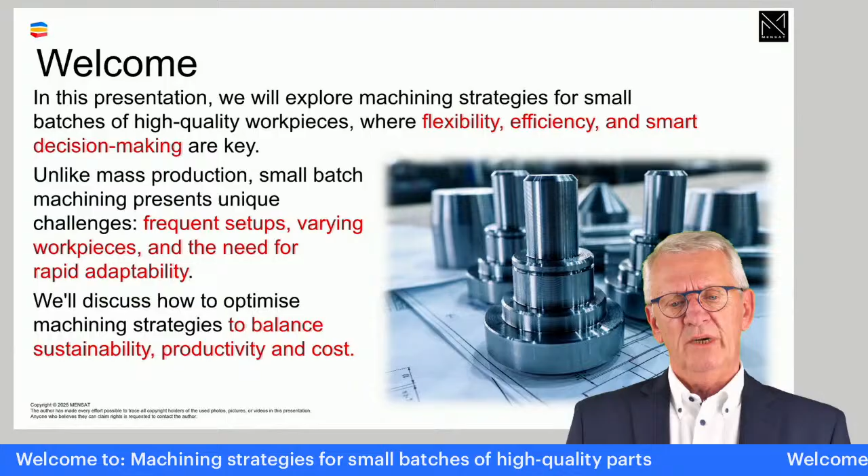While if we talk about small batch production, it's very much the opposite, and that's why we started to ask the question: if we look to machining strategies now, is there a difference related to whether it's mass production or small batch production? And the answer is absolutely, there's a very big difference. And in this hour, which is very short, we want to draw your attention to a number of things.

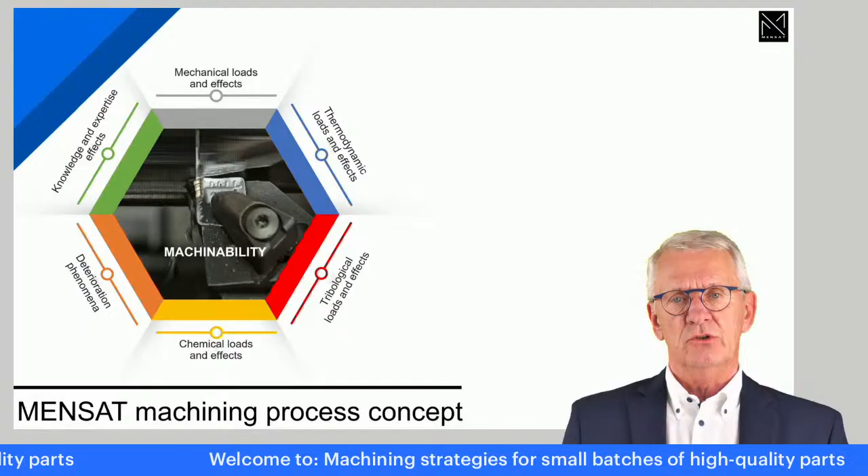Now, the underlying model I always use for this type of presentation is a machining process concept, where we say machining is a physical process where we form workpieces by removing material from it. And in doing so, in this process, there's lots of phenomena taking place. You have the mechanical side, thermodynamics, and so on. We have to make sure that all these things are in balance with each other. And balancing these means that all the variable elements, we need to understand how they interact, how they influence the process, and make sure there is a balance.

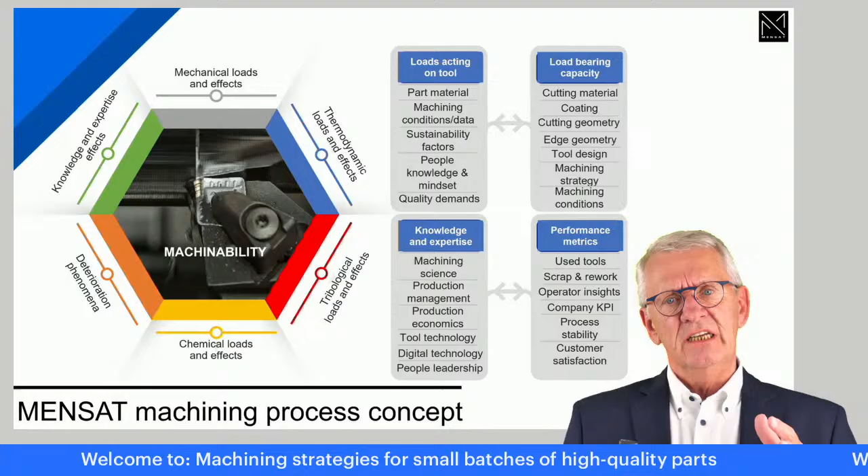And to make that happen, what we need is, I call it the knowledge side. We need knowledge of the process, we need experience, we need expertise, and so on. And all of that we need to put there so we can create the balance we want. In such a process we also need, of course, metrics. We need to measure how good we are in balancing this process, so we need metrics to measure. And on that, I'm going to talk several times today on how we can use certain elements to see, to measure, to evaluate what is going on.

And if we do all of this, machining leads to the wanted result, which is kind of a multidimensional thing. The wanted result is quality of the finished workpieces, of course. But the wanted result is also economic, because machining is a very nice thing from a technological perspective, very exciting to work with from a technological or scientific perspective. But we should not forget that in reality, in the industry, people do machining in their production with an economical perspective. They want to make some profit, they want happy customers that are happy with the delivery times which were promised and so on. And there is, of course, also, with one umbrella word, the sustainability side of it.

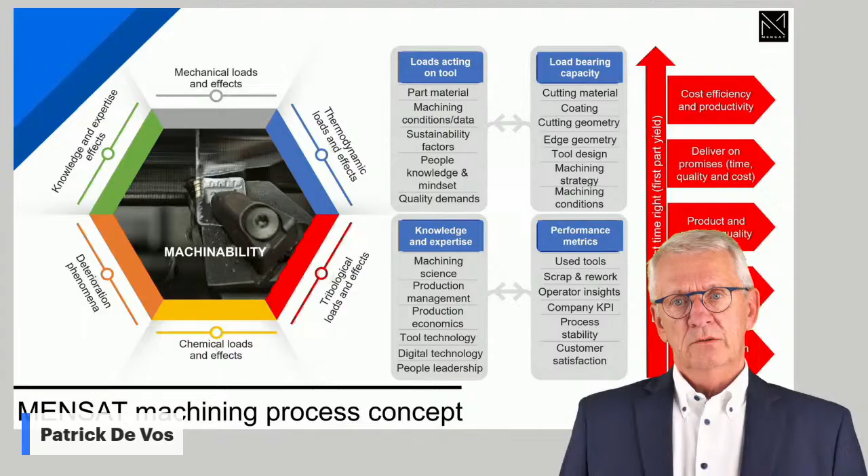Today we are going to spend quite some time on this, because if we dive into machining strategies, what are the differences between mass production and small batch production, it's mainly in the sustainability dimension that we see big differences, and we have to anticipate on that. Now, if we talk about machining, we want to produce high quality workpieces at an acceptable cost and price for the customer. We want to keep our customers happy, meaning we deliver in time, with the wanted quality and quantity.

There are things we have to make work together. There is the strategy side: how are we going to do something? There is the tool side: which tools are we going to use? There is the machining data side: how are we going to use the tools in the application? And there is the human side, the intelligence side, because somebody needs to put things together in a working order.

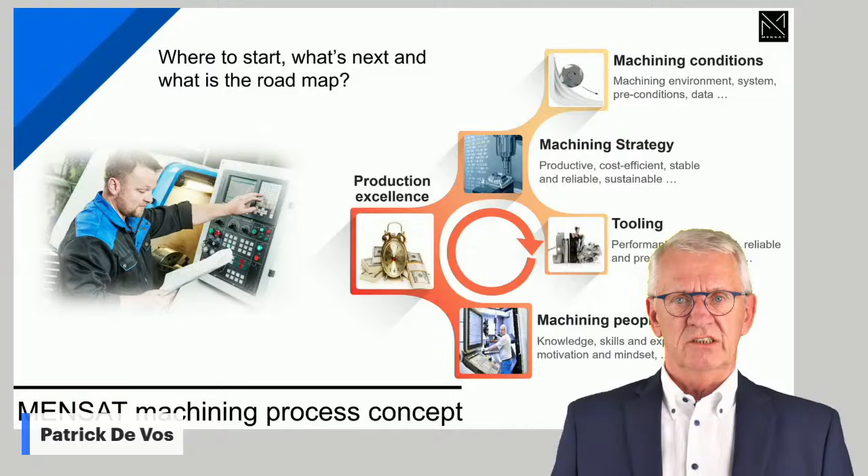If you look back at the previous events, we have been talking about tooling from this perspective, and we have been talking about machining data. Today we want to talk with you about the strategic side, the method side, the machining strategy side of it, to create as full a picture as possible.

I'm of course not alone. I'm together with two lovely colleagues that are helping make this possible. As I always say, for me this is big fun - I like to talk about machining, but there is the hard part of making all of this happen from a technological perspective, and the two ladies are taking care of that, Alesia and Margarita.

The agenda of today: there is a first part which we are going to walk through very, very fast. That's the technical side, the technological side of strategies. That has been discussed so often that here I just want to bring to mind some basic stuff again. I want to focus mainly today, when we talk about machining strategies, on the economic dimension and the sustainability dimension, because that's where we are going to see big differences between mass production and small batch production.

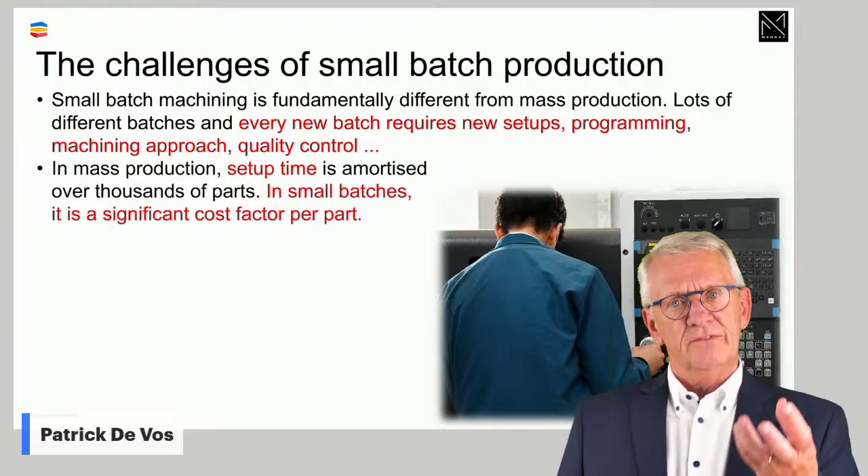One of the elements we take into account when deciding which strategy is best to use is the impact of the strategy on setup time, because some strategies will demand more setup time than others. And that goes for all the other factors too: downtimes, unexpected downtimes, scrapped workpieces due to bad quality, total tool life impact, and so on. It's all very different compared to mass production.

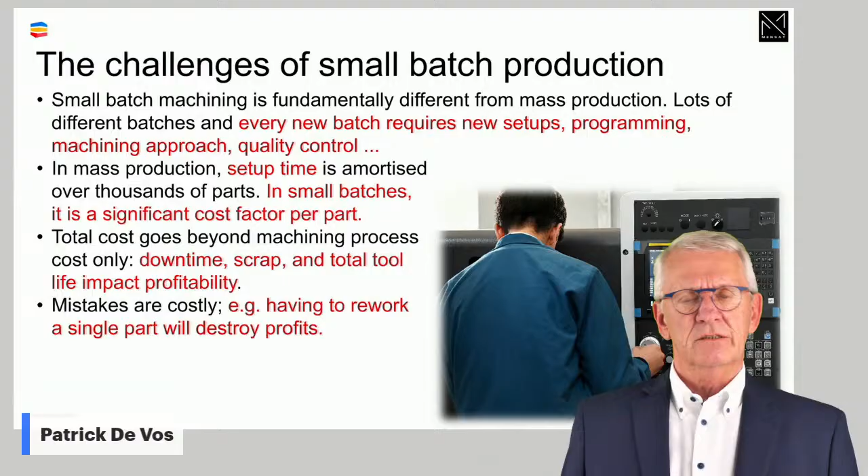And last but not least, errors and mistakes. If you destroy a workpiece when your total batch is 1,000 workpieces, you lose 1 out of 1,000. If you need to produce only one workpiece and you kill it, you destroy it, you lose everything. You can restart, but restart means the same costs again, the same time again. Trust me, your customer will not be happy. Some people take care of it and say, well, to minimize the risk, if the customer needs one, we will produce two - if we lose one, we still have one.

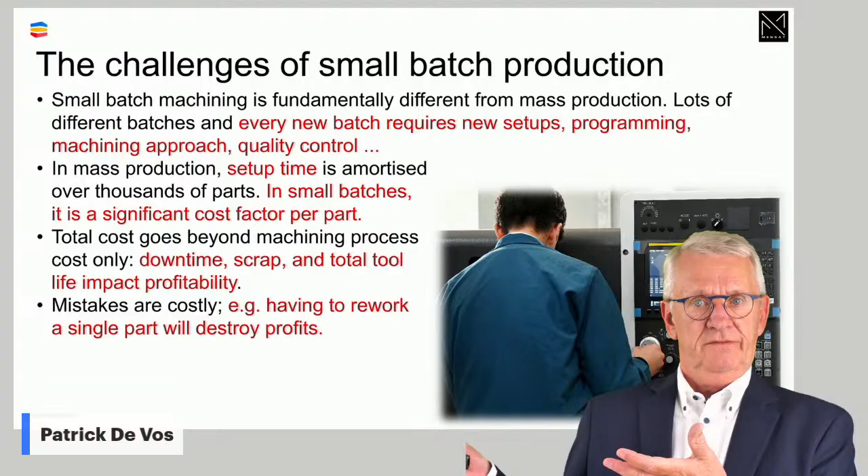The finance manager in the company will not like that, because if you do that for a whole year, that means by the end of the year you have an enormous stock of security workpieces, which has cost a lot of money and time in production, and they are lying there doing nothing. So the finance people will say, what are you doing? It's a tricky thing, small batch production.

Now, if we talk about tool selection for small batches, there's always that dilemma, because tool selection and machining strategy - the question is, which one is the driver? Is it the selected machining strategy that decides which tools to use, or is it the selected tools that will tell you which strategies are possible?

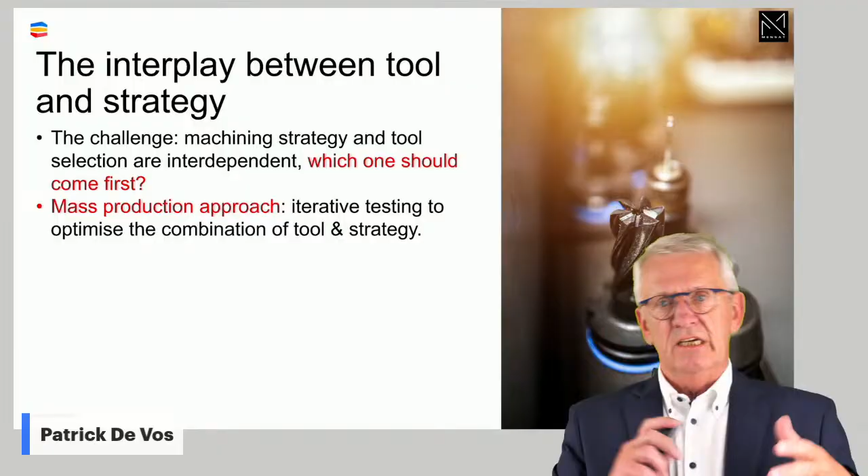In mass production, people take it the pragmatic way. They say we start doing testing, we make combinations, and we see in the end which one serves best. In small batch production, that's not possible. Well, it's possible, but it's not justified from an economical perspective. You can't test for a week to produce one workpiece. So you need to make a decision up front before you start machining.

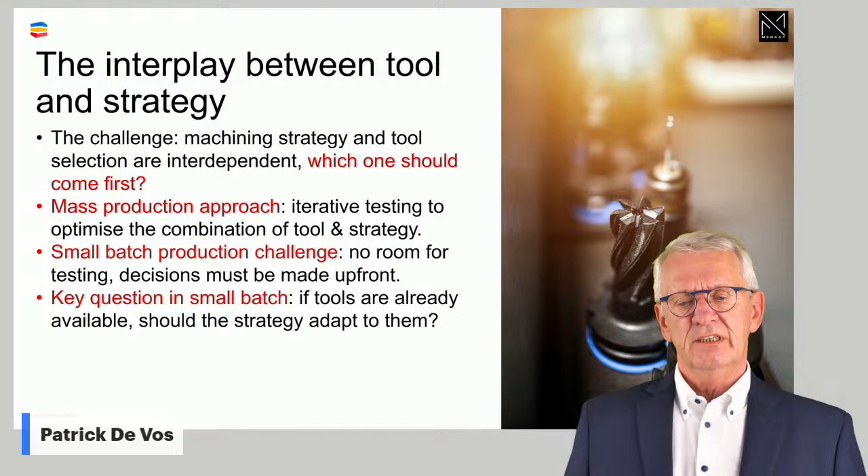And a key question you are going to confront is: if we already have tools in the workshop, from all the previous workpieces we made, should we reuse those tools and modify the strategy? Should we say, okay, we already have a whole range of high feed milling cutters, and for the next workpiece we think high speed would be best - should we say no, forget about high speed, use the high feed cutters and modify our strategy? Is that what we do or not? Or do we say, no, we need high speed, so we need another set of tools, we need to buy another set of tools?

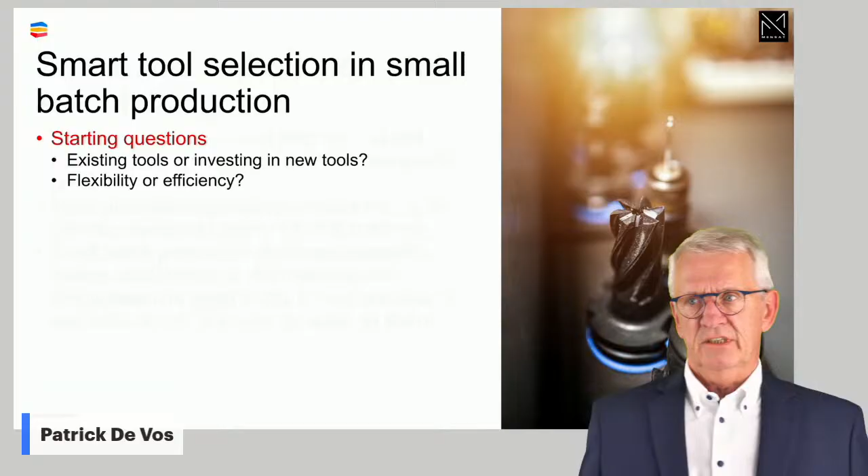In small batch production, if you talk about tool selection - and again, I'm not going to make friends here - I don't think you could leave this to technical people, because technical people are much too much in love with machining, the technical side of it. It's rather more of a management thing here. Should we maximize the use of existing tools already, or should we invest in new tools? In other words, should we go for flexibility in tool selection, or should we go for efficiency?

And if we try to put some criteria together for new tool selection, it's about versatility. If you go for flexibility, you need versatile tools. And people say, yeah, but versatile tools, situation by situation, are perhaps better solutions from a technical perspective. Then you put the process cost efficiency on the table - I want to do workpiece by workpiece efficient machining, cost efficient, time efficient, quality, whatever efficient. Yeah, it's okay for me.

But then you have the other question popping up: if you have a very efficient tool with a tool life of 2 hours, and you only needed 10 minutes to produce that one workpiece, what are you going to do with the remaining tool life, the total tool life utilization? That is then a thing. And it's not only for tooling - the same question comes up with setups, workpiece holding, and so on. Should we go for flexible systems, or should we go for efficient systems?

Reconditioning and reuse of tools in small batch production, I think, is a very important thing. Because in mass production, very often people exploit the possibilities of the tools to 100% already, and then, is there something left for reconditioning - that is the big question. While in small batch production, it's a completely different situation. I have seen tool cribs, where they keep the tools, where 90% of the tools kept are still very capable of being used in another workpiece.

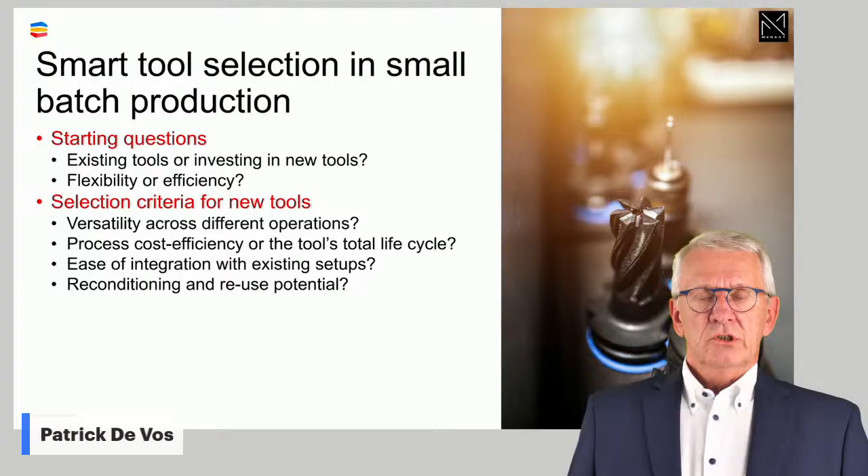The tricky part is nobody knows how much. People say, yeah, of course you can still cut with it, but if you ask the question, how long? I don't know. And that 'I don't know' - there you have an issue, because who dares to take a tool and start using it if you're not sure it's going to do the full job? Think about what happens if the tool fails - broken tools, but also destroyed workpieces.

In small batch production, if you put everything on the table, all the different things that are important in production, in 90% of the cases, and everything depends on how you did before, the best approach is to say: okay, I have my set of tooling, and it can be cutting tools, but also clamping tools, measuring tools, whatever equipment you have around the machines. I optimize the process around the tools. This is the tool, that's it. Now, to produce a workpiece, which strategy, which cutting conditions, which cutting data would I use to make sure this tool does the job?

In that respect, CAM simulations - I would urge you to do even more CAM simulations in small batch production than in mass production. That's a misconception. People sometimes think if I need to do a big number of workpieces, I should spend the needed time preparing, on CAM and simulating, and that's correct. But in small batch production, it's even more important, because if you fail on the first workpiece and you need only one workpiece, you are into a collision course with your customer. So it's so important, that CAM simulation part.

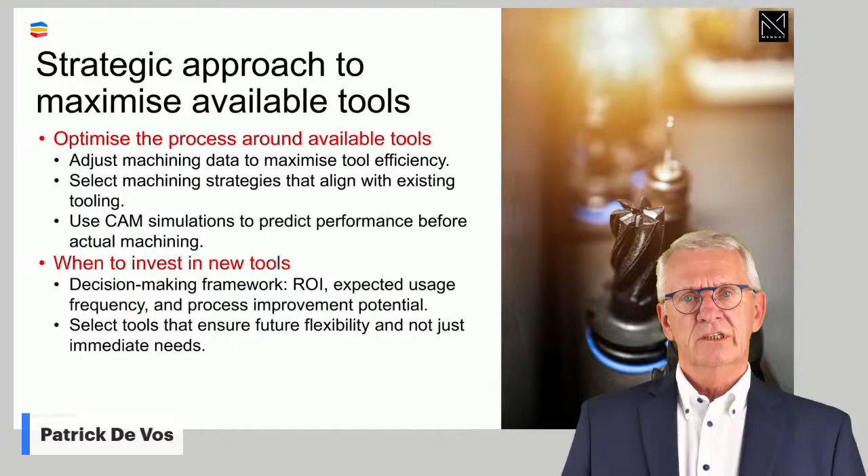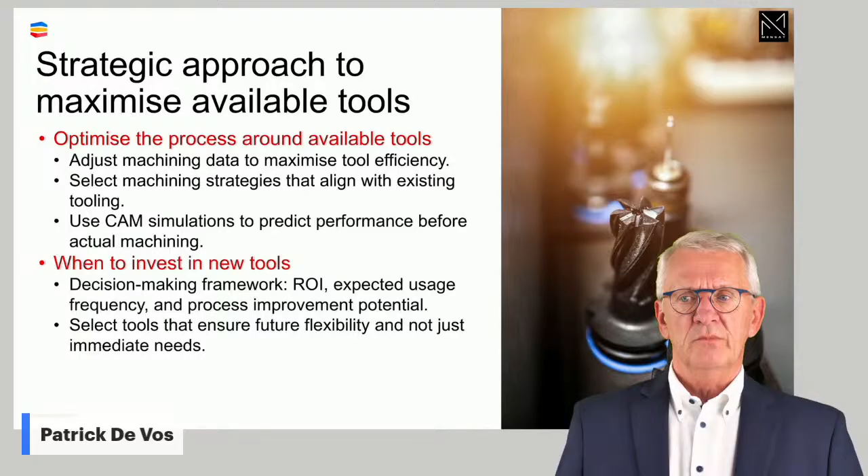If you invest in new tooling, because you can't run the same tools forever, now and then you have to challenge the tools you have in a workshop and ask yourself, is this still what is best available for me? Make sure you use a full vision decision-making framework - not select a tool which is best for one workpiece, but look to the total return on investment for a certain tool over a number of different workpieces, over a certain time, over a different number of machines, and so on.

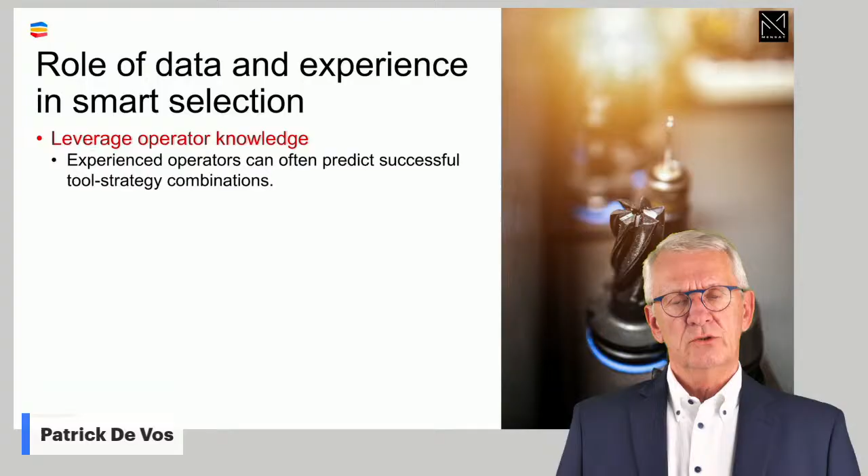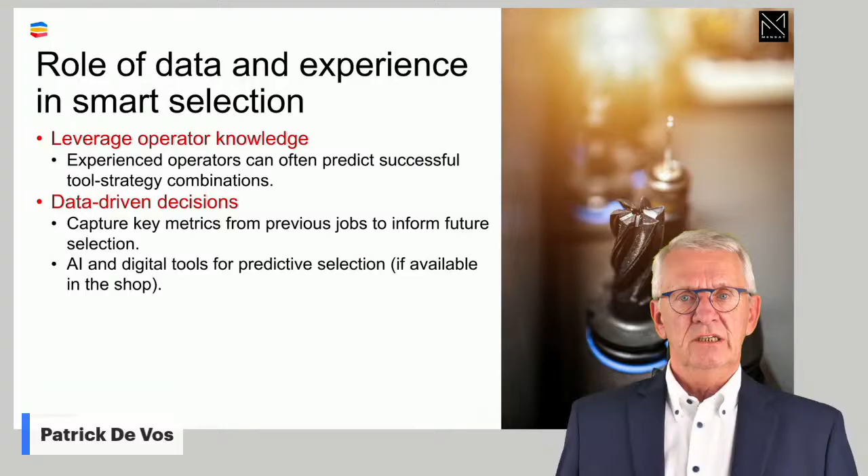Count on knowledge which is available in the company. Your operators, they know quite a lot about which tool is working, which tool is less working, because they are daily confronted with it. And of course, in today's world, with all the possibilities we have - it's only an hour ago I had a discussion here with a colleague, and I said, yeah, in the past we knew it, but from a practical perspective, it was impossible. Today, with all the digital possibilities we have, put the data together and see if you can recognize some trends in it.

In small batch production, the main thing is that you have to find a good balance between universality, adaptability, flexibility, versatility - all the different words for it - with a limited amount of equipment and as big a range as possible for workpieces you can produce. And that adaptability you should find in the tool set you use in the workshop. Optimizing the available tools, that's what you do through the strategy selection and the cutting data selection.

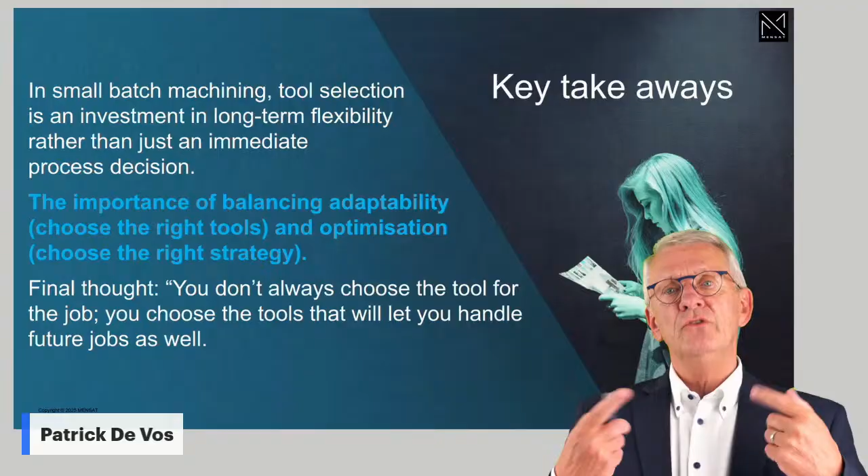I think in small batch production, it's this balancing that is the core on which we have to base our decisions about which strategy to use, but strategy defined beyond the cutting edge. I'm going to come back to what I mean with that. Now, if we talk about strategies very quickly - a strategy is a scenario we could use. It's a technical scenario originally, which we could use to finish a certain workpiece, to do a certain operation, to finish a whole batch of workpieces, whatever.

And it starts from: what are the targets in the company? Those targets, they drive all the rest. They drive the CAM programming, they should drive tool selection, they drive cutting condition selection, and so on. And it all links together.

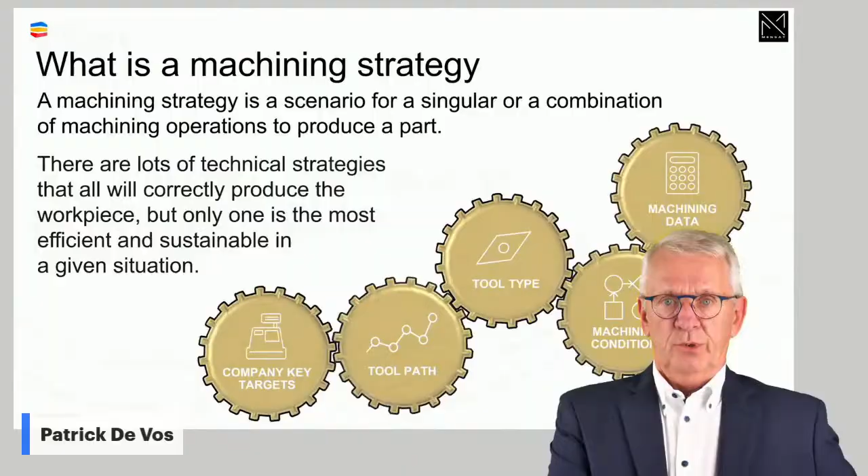Strangely enough, it's a remark I want to put here - so often in a workshop I see just the opposite. People start with, I like high-speed machining. So people already have a high cutting speed in mind. And then they look, yeah, but a high cutting speed, I need good cooling - cooling is important, that's the cutting conditions. And then they say, yeah, but for a high speed operation, I need a high speed cutter, so the tool type is defined. And a high speed cutter, you have to be careful how you move it, so suddenly the tool path generation, the CAM part is decided. And then they say, and you know what, it's cheap. And then I think, wait a second, you are going the opposite way. You should start by defining: I want a cost efficient approach, and that should drive all the others, not the way around.

Talking about strategies, there are families of strategies. Geometrical strategies is about how do I move the tool. Technological strategies is about the machining process, which core technology do I use or do I want to use? You have the application strategies, connected to tool types. Face milling, square shoulder milling, slot milling, all of that is application strategies. And you also have, the best I can come up with, hybrid strategies.

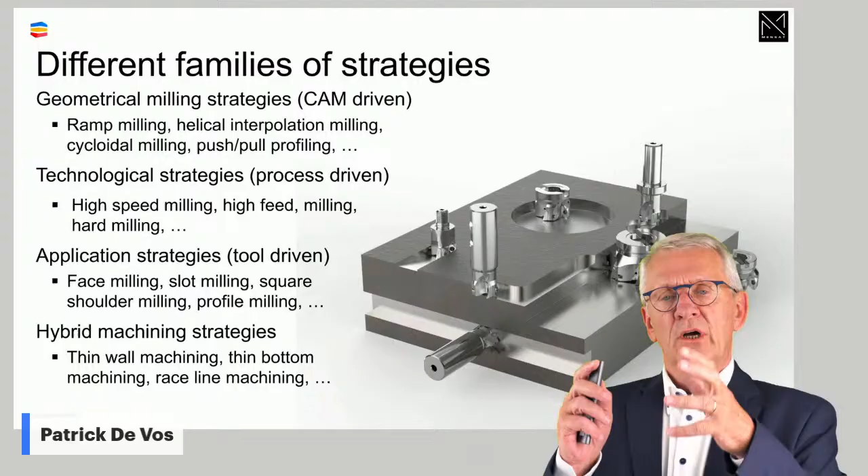Hybrid is where I'm confronted with a certain typical feature I need to machine, a thin wall, a thin bottom, or whatever. To handle that from a quality perspective, I don't only want to produce a thin wall, but a good thin wall. I start to combine partly geometry, partly technology, partly application to figure out how I can do best to come up with that finished feature, a thin wall I need. That's hybrid. Which is best?

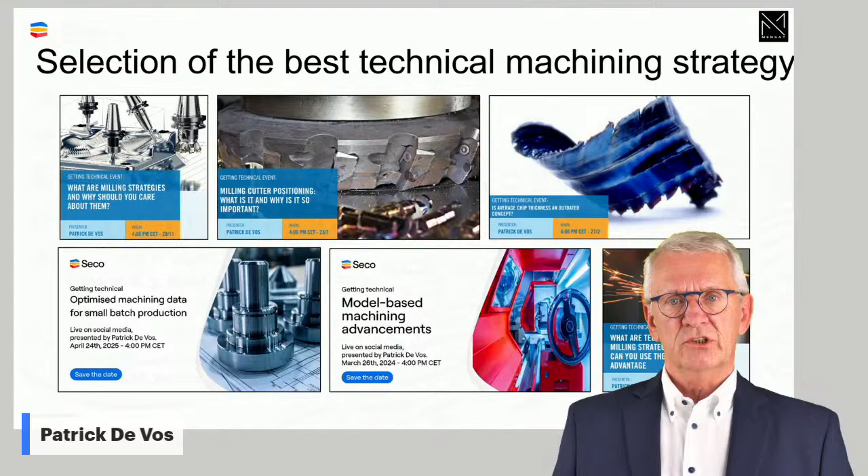I'm not going to spend time on it because at previous occasions, at previous Getting Technical events, we have been spending quite a lot of time on the technical side, the technological side, the scientific side sometimes about machining strategies, which one, where, how, what, and so on. So if you are interested in that, I would urge you to look at previous recordings of events.

One I want to put a little bit extra in the picture is that so-called high feed machining, or some people more refer to it as Z-level machining. Here you have a typical example. The strategy is deciding the tool, or the tool is deciding the strategy, whatever. It's the two together.

High feed, I think, as in the light of what we said before, what is important in small batch: versatility, flexibility, reliability. Those are a bit the keywords. I think if you put those up front, very often you end up at high feed machining. High feed machining is offering quite a number of advantages in that situation where we go for universality, flexibility, and so on.

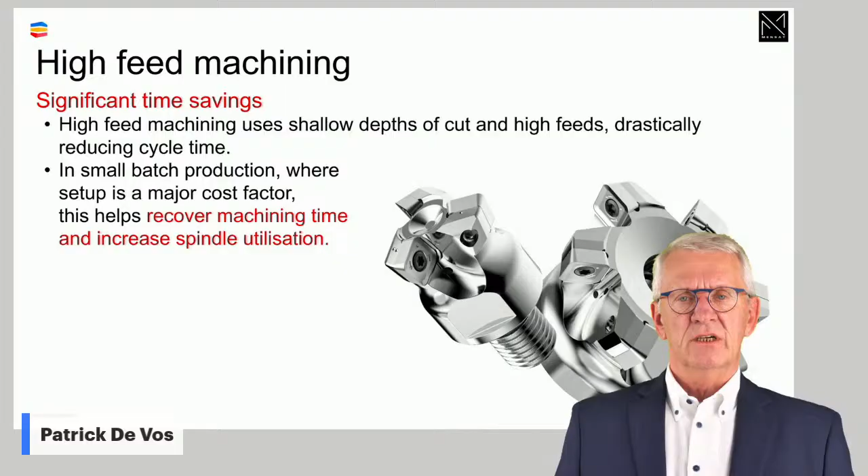High feed machining is relatively seen a very efficient machining system. If you look to the pure machining, very often it does the job faster; if you include setup and so on, then compared with other machining approaches, it makes it very often the most economical. Also from a tool life, total tool life optimization part.

First of all, high feed machining is a very smooth machining process compared with others. It's not so aggressive. That means tool life itself will show a tendency to be longer. On the other hand, if you have a high feed cutter that you can use in different applications, all the same cutter, what you end up with is a bigger total tool life, which makes it, from a tool life perspective, a good approach. It's smooth cutting.

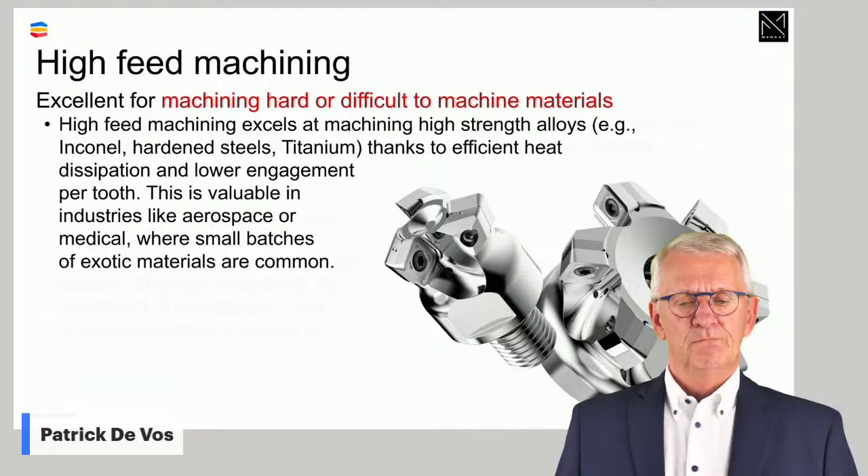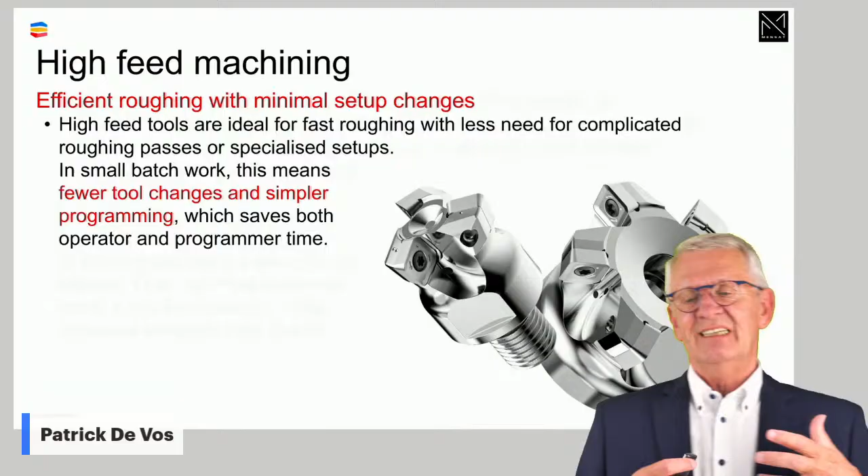It's very nice in difficult applications, typical difficult materials and so on. It allows you to do roughing without high demands on the environment - the technological environment - it's smooth cutting. There are no vibrations or lesser vibrations. There's higher stability, so from a workpiece fixturing perspective, from a machine stability perspective, it's less demanding. And it makes things smoother. It gives you higher process security.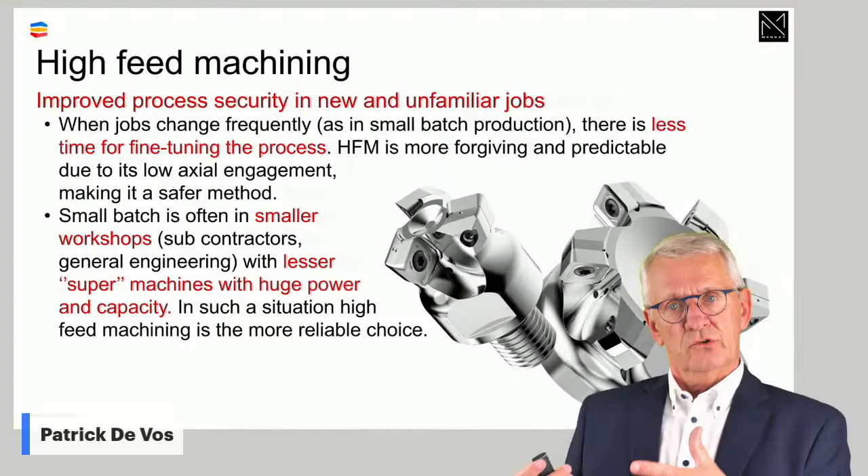A high feed cutter is a rather forgiving cutter. And also, to remove a certain volume of material, the power you need is relatively low. If you look to typical workshops for small batch machining, you don't find the big monster machines there - it's medium-sized machines, small machines. In such a situation where you have some serious machine limitations to take care of, and on the other hand, still you want to go fast, high feed machining is a very interesting approach.

I took high feed machining here as an example on how you could start arguing, discussing what would be, in a certain workshop, a good tooling family to start using as the standardized tooling for small batches. It's lesser about what is the tool life and what is the cutting speed and stuff like that. It's more about a general picture you try to create - how much can I do with a certain type of cutter, and look to the broader perspective.

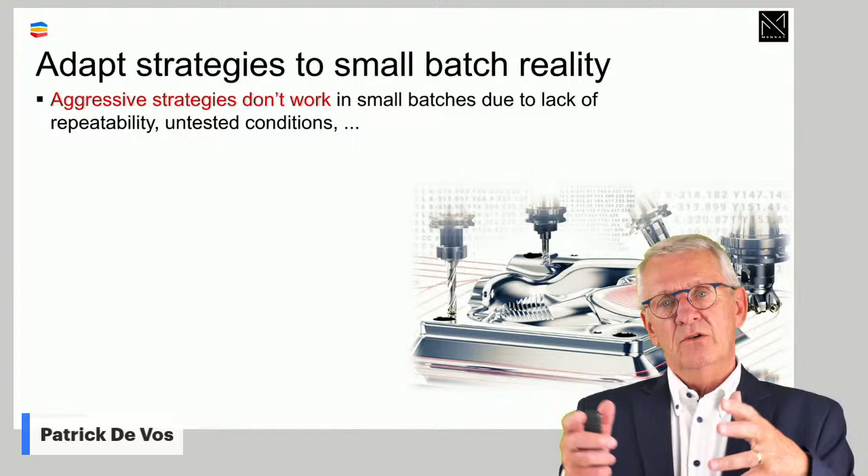Small batch, from a technological perspective, don't use aggressive strategies. By aggressive I mean high performance, high speed type of stuff. It's all very nice, but it's rather aggressive, meaning that to make it happen the demands on the environment, the machine, the fixturing, the setup and so on are rather high. And if you can't make it, you are in for some serious trouble. Avoid aggressive strategies. Think more in terms of stability and predictability. That's much more important, looking at the broader picture, than that aggressive one operation, one solution type of approach.

For setups, enlarge your view a little bit and see if, by modifying strategies and tooling, you can optimize - in this case meaning minimum time needed. If you can optimize your setups, if you use always the same type of tooling, the part of the setup time where the tools need to be set up is cancelled. And that's already a big gain in a number of cases.

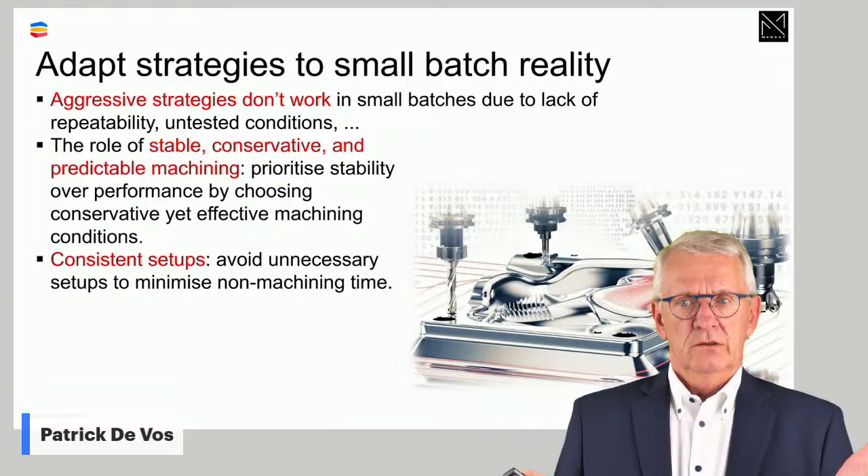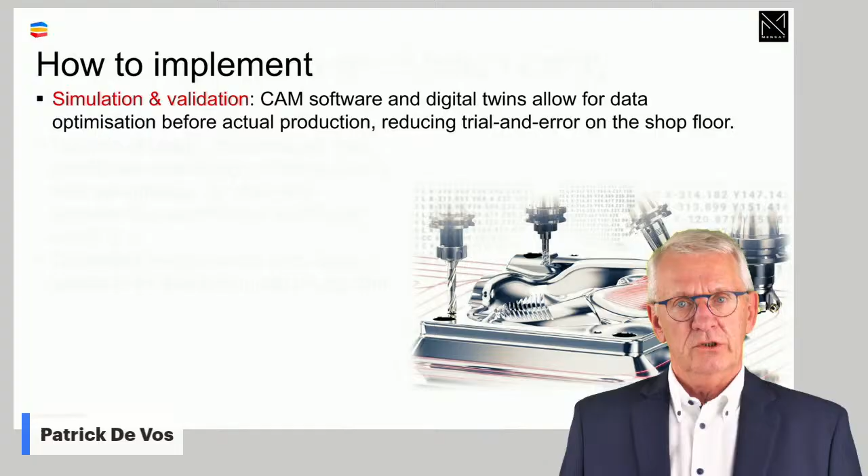I already drew your attention to simulation and validation before you start cutting, and it's very strange - people are well aware of the importance of this in mass production, but in small batch production, for some reason, I have an idea why: because people are always hurrying up, fast, fast, fast, the customer is waiting, this, that, and they start to take the wrong direction. They say we don't need simulation, we see on the machine what happens. Yeah, it could be, but if what happens on the machine is a catastrophe, you have a big problem. It's better to spend 10 minutes on simulation before you start machining, just to make sure.

Work holding. Traditionally, if you leave people a free hand, they say, yeah, I clamp my workpiece somewhere on the machine table, and then I start to do zero setting and modify my program and stuff. It's taking time. Why not use zero point clamping? Then you always know where the zero point is, and you don't need to do the zero setting routine each setup. Of course people say, do you know what zero point clamping costs? Yeah, I know what it costs when you buy it. But I also know what it costs in one minute lost in production time because you need to redo zero setting each time. One minute per batch, and if you have to do thousands of batches every year, you can calculate it yourself.

Real-time monitoring - keep your eyes on the process. I mean the operator, or the more modern approach with sensors or whatever, but keep monitoring the process, so that in case you need to correct or modify, you can avoid something ending in a catastrophe. And make sure there are feedback loops. What you learn on this workpiece, you should make sure you inform all your colleagues - in engineering, in programming, perhaps even management, because management sets the pricing to the customers, and if you end up with a big problem with whatever, you should inform management so that next time they can take that into account.

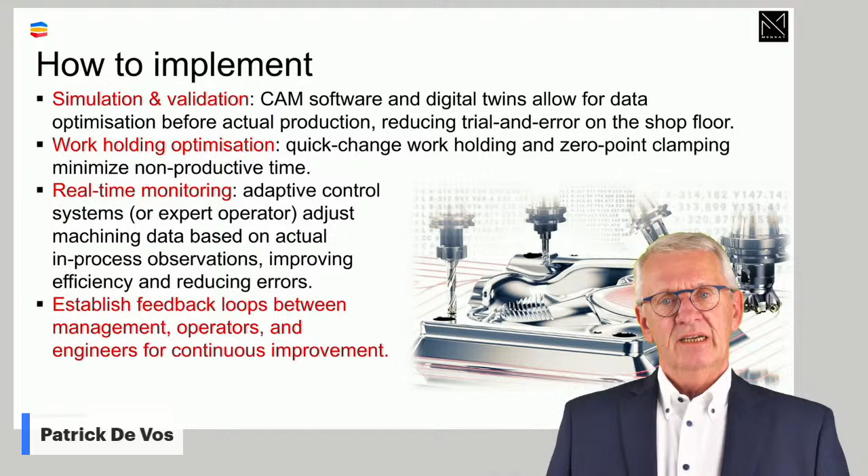Also, feedback loops between different batches - what I learned from this batch I should take into account for the next batch.

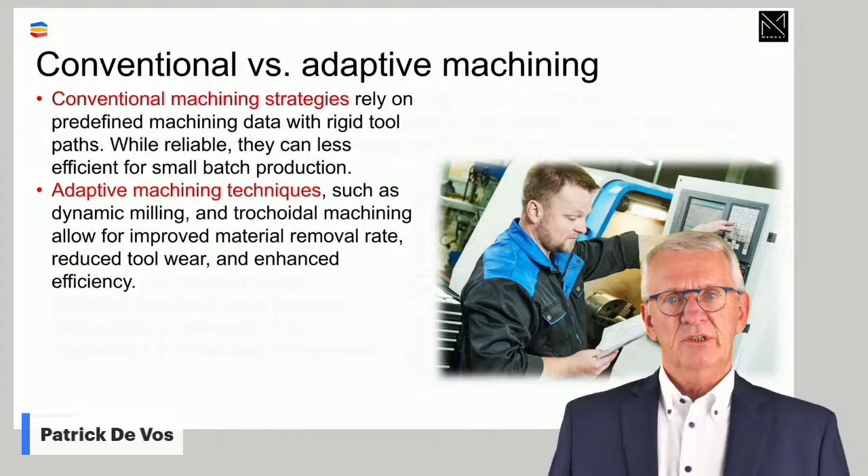In that respect, you have conventional machining approaches where people say, okay, I have one tool, one set of cutting conditions, one workpiece material, that's it, and everything is kind of fixed. Contrary to that is what is called adaptive machining - I constantly modify and adapt things in the process relative to the actual situation taking place. That's called adaptive machining. People connect it to sensor techniques and stuff, but if you have a good operator, adaptive machining is in reach, if you give the operator the freedom to do his job seriously. Adaptive machining, I think, is most interesting in small batch production, much more than conventional machining. And conventional - no misunderstanding - I don't mean a conventional milling machine, both can be CNC machines. My word conventional means one cutter, one set of cutting conditions, and I don't change that. Adaptive means I have one cutter, but I modify cutting conditions even in process depending on what's going on.

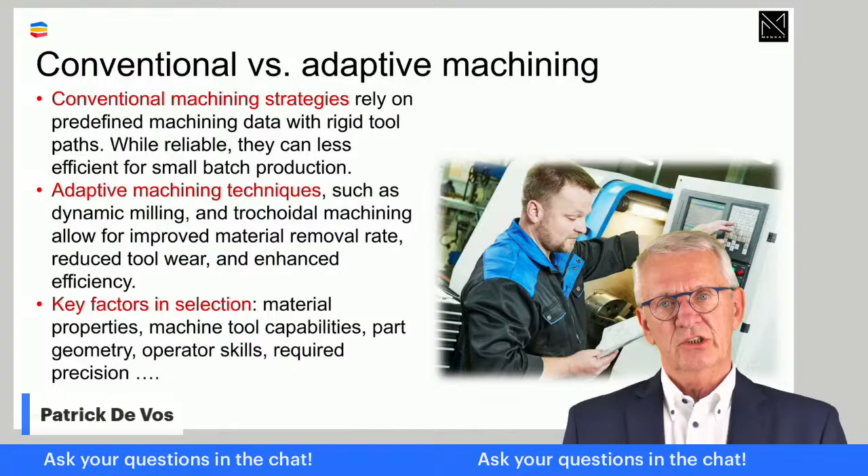Key for that is that you have a well-equipped machine with sensor technique, or that you have a well-skilled operator at your disposal.

Don't look for cutting speeds and stuff, but look for how to come to a good combination of an application, a range of tools, or one tool, a set of cutting conditions with a window of adaptability that you can share. Do your evaluation like this, and don't each time think you need a new milling cutter for a new batch.

Some economical thoughts when we talk about machining strategies. Very often people like to talk about cost per part. I suppose a number of you know what cost per part is, it's about efficiency. I would like you to forget that cost per part from a machining efficiency perspective, but look more to something from a process stability and quality perspective.

You don't want to produce one workpiece, one batch in the best possible way and destroy all the others. No, you want all to be good by running stable machining processes. And that per part it costs a little bit more - who cares? Because we see that in the end, the machining cost is negligible small in small batch production.

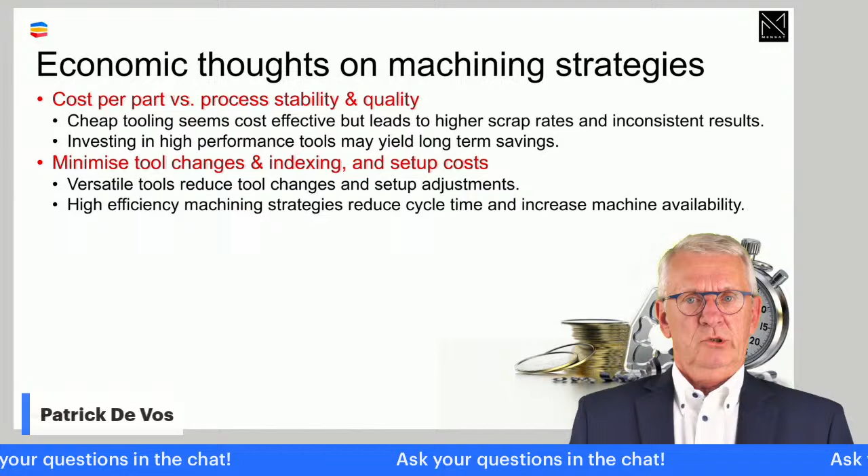Think in terms of if you minimize tool changes, if you can minimize tool indexing, if you can minimize setups, how much money you can save in terms of creating extra machining capacity. Because if instead of spending 1 hour in setup, you spend only 30 minutes, that gives you 30 minutes extra capacity to actually produce workpieces. That's also a cost thinking.

Think on total tool life, not tool life per workpiece, tool life per application, but take the tool up front and say this tool has a full capacity of, I don't know, 2 hours machining. How can I use it as such over different batches of workpieces so that I reach the 2 hours cutting? Instead of after one batch saying the tool is up to 60% used, I throw it away and take a new one for the next batch. That's a waste of money.

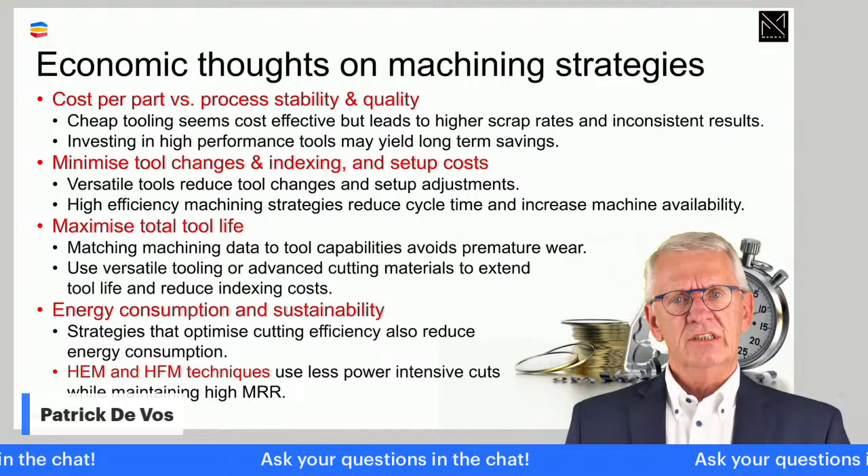And you have the energy consumption thing. Energy costs money. In machining, a lot of people talk about the labor costs and tools which are expensive, and still today, I have a feeling that the energy thing is a bit neglected. But I would say next time you have the opportunity, check on the electricity bill for the workshop. You could be in for a surprise.

Digitalization plays an important role. I think it's a strange thing, because artificial intelligence and digitalization is really showing all its possibilities, all its potential in small batch production. While if I talk to people, they say, no, all that digital stuff, that's for mass production, that's not for us. I don't agree with that. I think the smaller the batch, the more you should try to exploit the possibilities we have with digital techniques.

Programming time, simulation, all that type of things - we should really exploit it to the maximum. If there is a possibility, start working with digital twin technology. That's the summum of simulation technique.

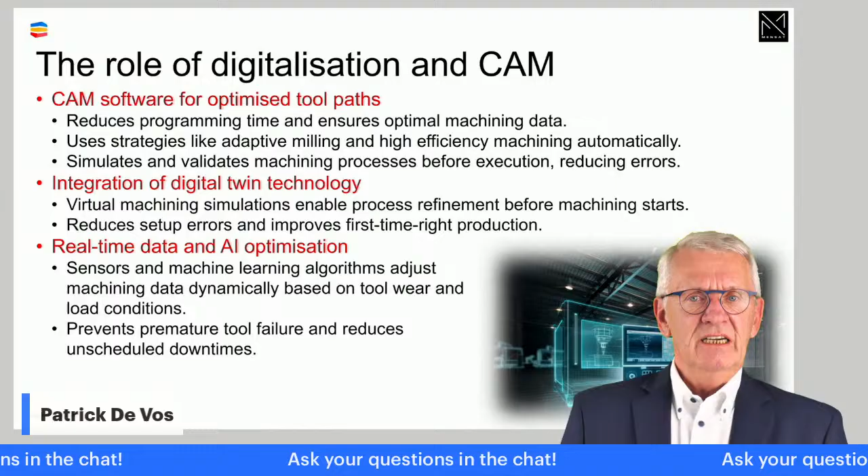There you have, or you could start dreaming about in-process live simulation while machining, real-time data, artificial intelligence to recognize trends and so on. It's all things which I think are very important. Until we have that fully in operation, it's still the operators we have to rely on, and a knowledgeable, well-trained, well-skilled, motivated operator can do things which are today not yet possible digitally.

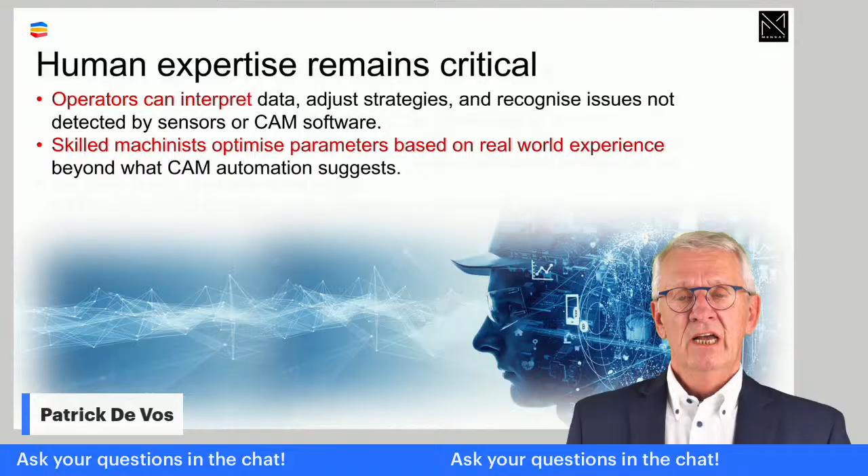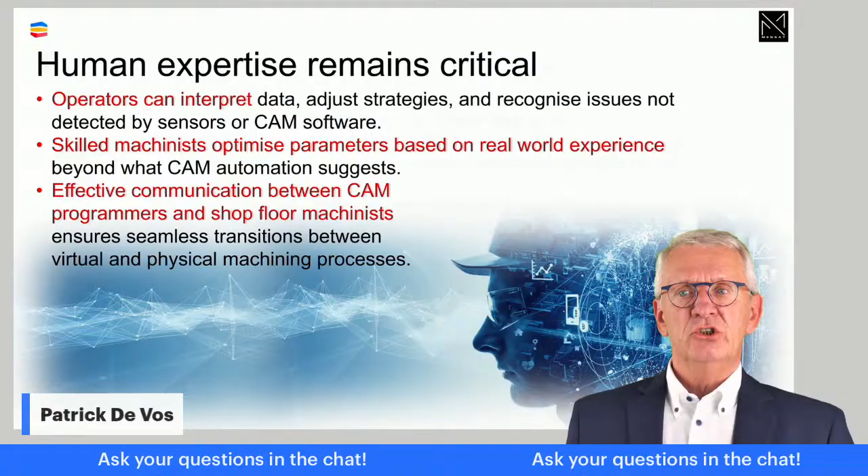They can pick up signals that indicate that the process is going in a certain direction, perhaps a direction we don't want to. He can optimize parameters, data, depending on what he hears, what he sees. And if he's motivated enough, he can be very effective in communicating his experiences with the programmers and the engineers about how things are going.

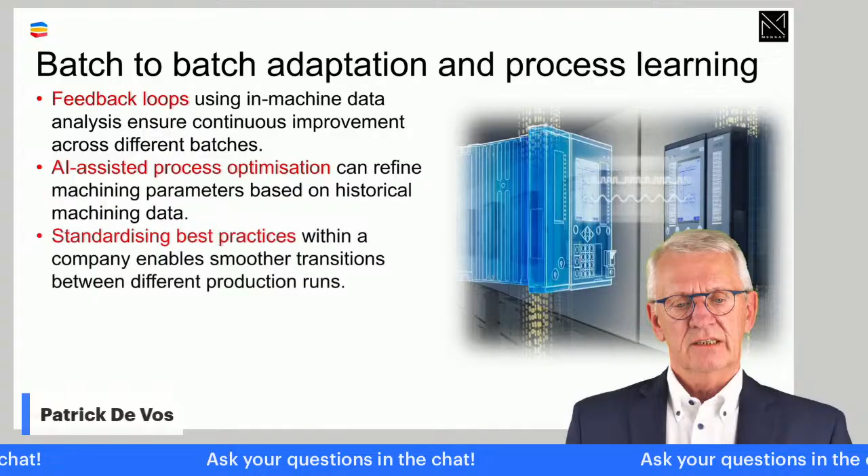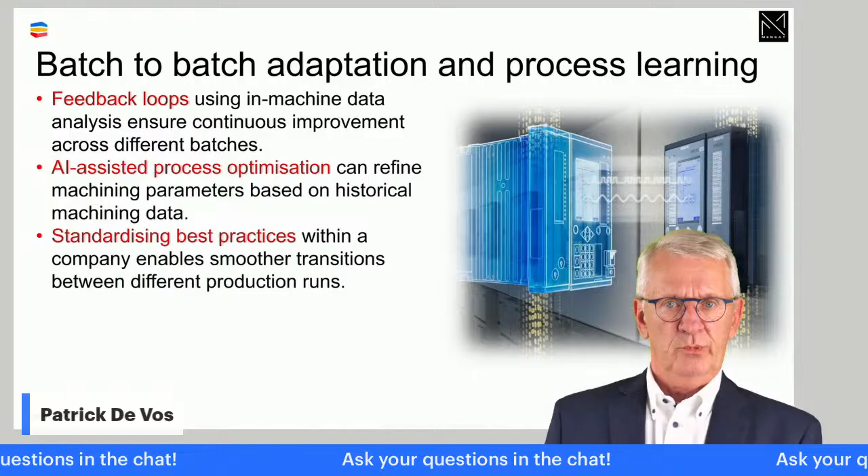And as I said, feedback loops should not only be between people, it should also be in between batches of workpieces. What I learned from one batch, I should take with me to the next batch. Artificial intelligence can help in the future. In the meantime, because sometimes people say it's not for me today, you still have the opportunities of working with what people call SOPs, standardized operating procedures, where you put your knowledge, your expertise in a structured shape and make it available for other people, so that the knowledge which is in the company is spread more in a wider network of people.

Sustainability, a loaded word. Everybody is into sustainability. Still a lot of discussions, still a lot of interpretations.

For me, sustainability, if I think on it, one could say in a very general way, is doing what needs to be done today without jeopardizing the future. What I mean with that is, today I need workpieces, or my customers need workpieces. So I should focus in such a way that today I do what is needed to give my customers what they are demanding for: quality workpieces in the correct quantities, in the correct time. That's my short-term objective. But I should do that in such a way that also next week, next month, next year, 10 years from now, I'm still able to do that for my customers. For me, that is sustainability.

And that means that sustainability goes far beyond the environment only, which for a lot of people is what they translate it to. Sustainability is an economic responsibility, a technological responsibility, a responsibility to the planet of course, and a responsibility to your customers. There's so many dimensions in the word sustainability.

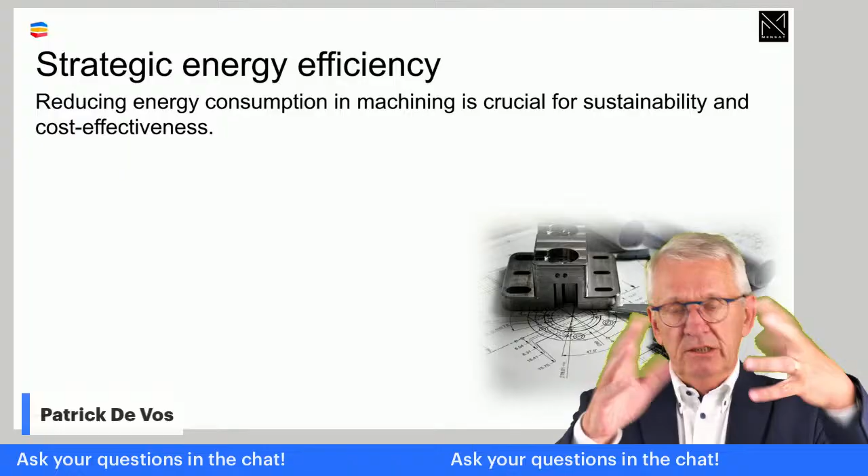Don't blame sustainability all the time. It's going to help you a lot if you play it right. Process optimization: make sure you select the strategies that give you the lowest energy consumption. Make sure that your machines are not standing still. Because if your machines are standing still - I gave this example at the previous Getting Technical event - from an economical perspective, they don't do anything. They don't produce workpieces, and it's the workpieces with which you earn your money. So when they are standing still, they cost. They bring you no advantages, but they do cost energy, they consume electricity.

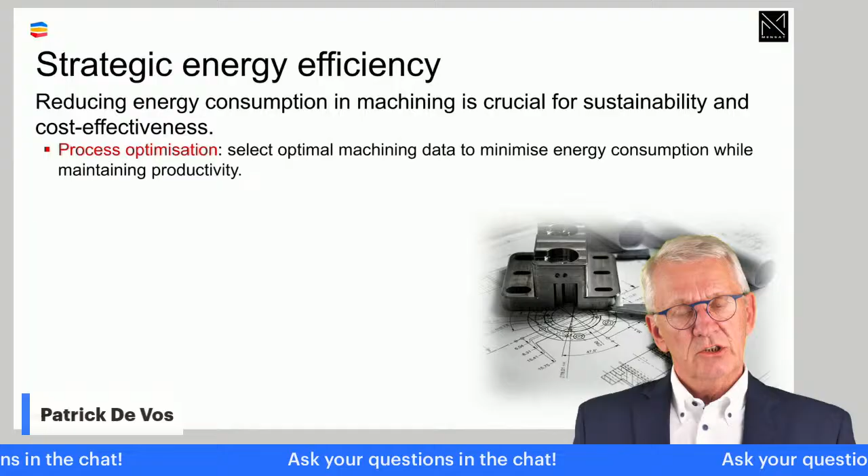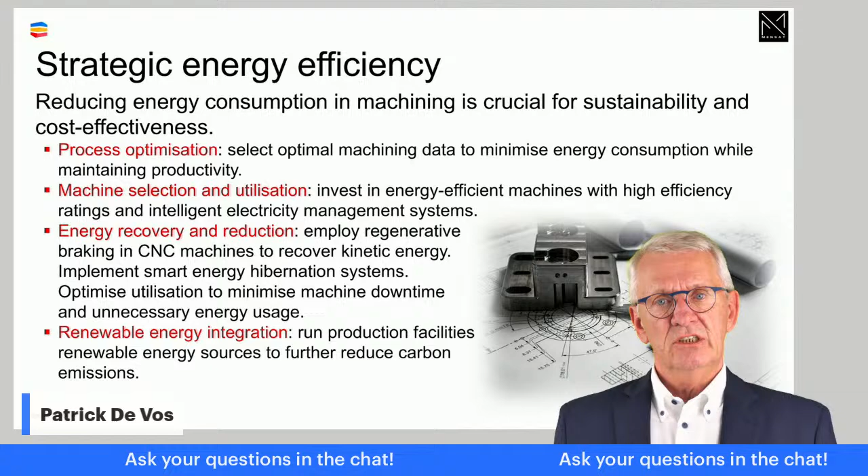So for process optimization, the process itself should consume the lowest energy possible per whatever unit you want to measure it. But you should make sure that your machines are running all the time. Your machine selection in that respect is very important, and your machine utilization is very important too. If you look at machines today, there are so many possibilities for energy recovery or energy reduction. When you are slowing down the machine, it's a little bit like electric cars, you can take part of the energy there and transform it back. Use renewable energy - the last two, I think you're all aware of. But also the first one, strategy selection, tooling selection, cutting data selection, is a big source of energy reduction. And energy reduction is good for your wallet and good for the planet.

Resource utilization - waste which is generated, material costs and so on - is another thing. Here we talk about resource utilization. You have material utilization strategies. Already 30 years ago, we talked about near net shape machining, where removing a lot of material in roughing takes time, it takes energy, and it's wasting material. So we should look to that. Raw workpiece materials, how are they? Which shape, which form do I need to remove a lot of material?

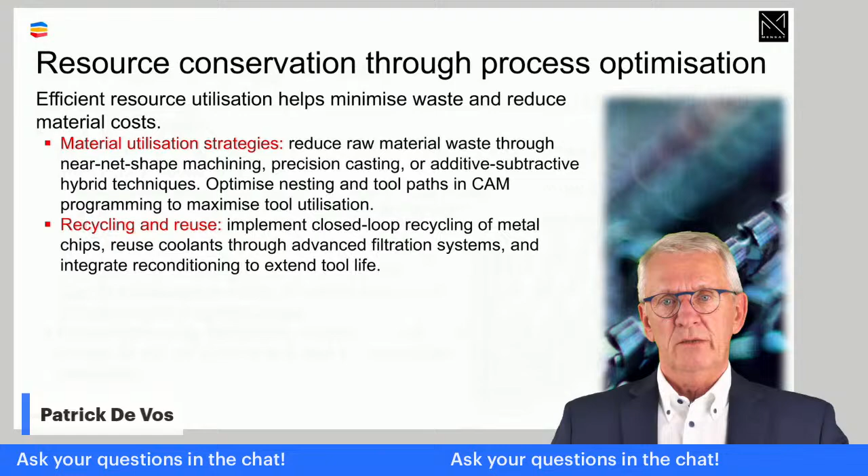Efficient resource utilization, waste. Machining is an operation where, unfortunately, it's part of the technology - there is waste, coolant and lubrication. After a while it needs to be taken out, and I know it's recycled and so on, but still it is waste. One could ask: are there possibilities to cancel it completely? It's worthwhile asking the question. People say, if I leave the cooling out, my tool life is going to be shorter. I agree, but remember, today you throw away your tools at only 60% use, you have 40% capacity left. That 40% capacity can handle the 10-15% loss in tool life from taking the coolant out. Look at the broader picture is what I try to say here.

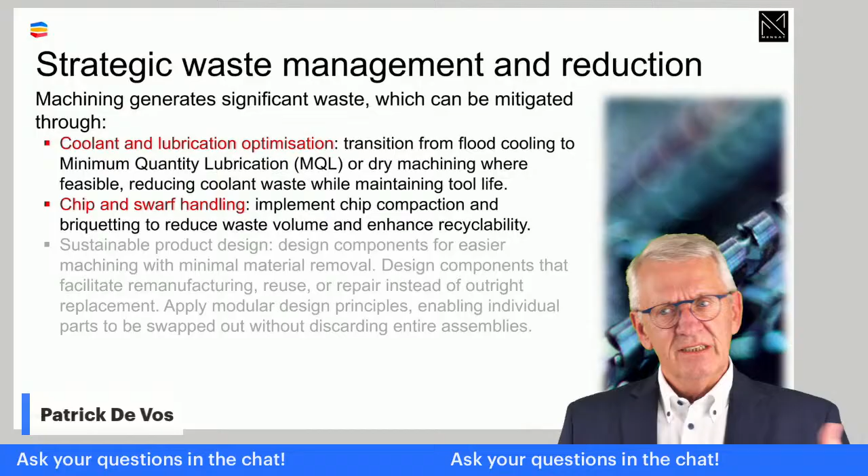Chips, swarf, are easily recyclable nowadays. There are all kinds of techniques where people can handle chips and reuse them afterwards. And there is the part of sustainable product design. I put this a little bit vague because if you're in a workshop and need to produce a workpiece, most of the time, especially for small batches, there's no time left to discuss the design of the part. So this is a bit theoretical, but it could be.

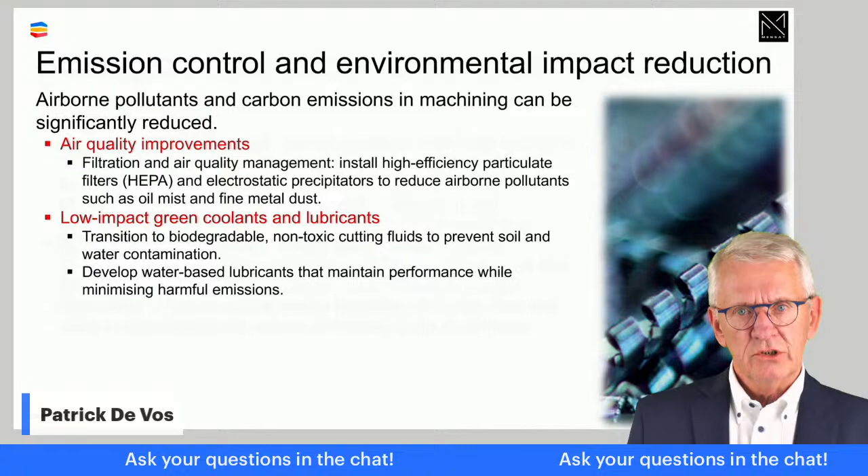A big source of pollution in machining is air pollution. Filtration techniques and stuff are important in that respect. Green coolants, green lubricants are available. Investigate what it could give you, what it could bring you.

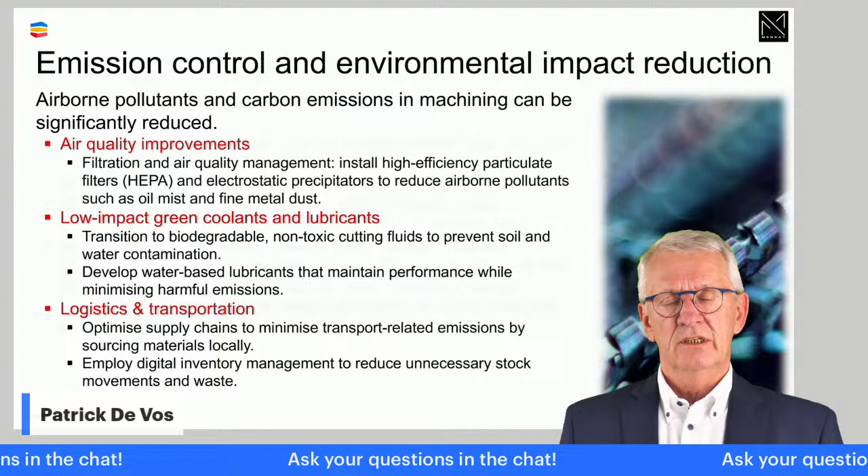I didn't know exactly where to put this, but logistics - supply chain optimization to minimize transportation and so on. Also intra-company: make sure the layout is such that workpieces aren't traveling all the time somewhere in the workshop between machines, because that also creates pollution.

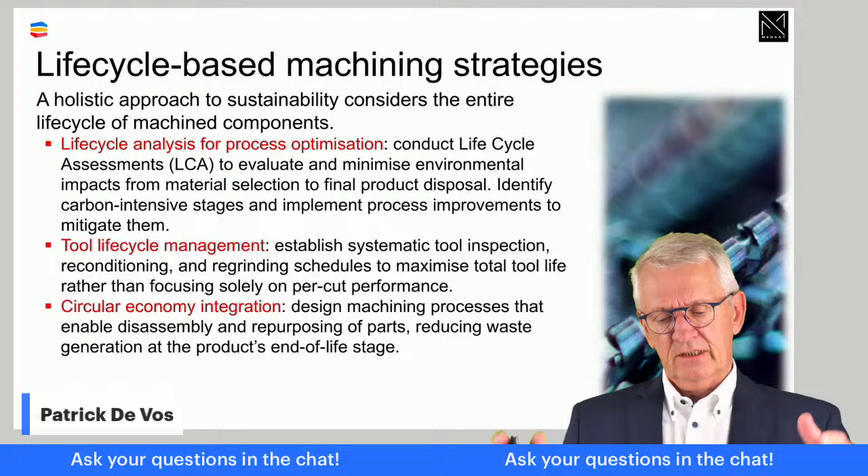Life cycle based approaches - you can do life cycle analysis for the total process, or on a narrower scale for total tool life, to see how to handle tools so the full potential available is exploited over different batches. Circular economy principles - there are some interesting principles in that so-called circular economy, and people always think circular economy means externally, me with my suppliers, me with my customers. But also in a workshop, in one company, we can do circular things.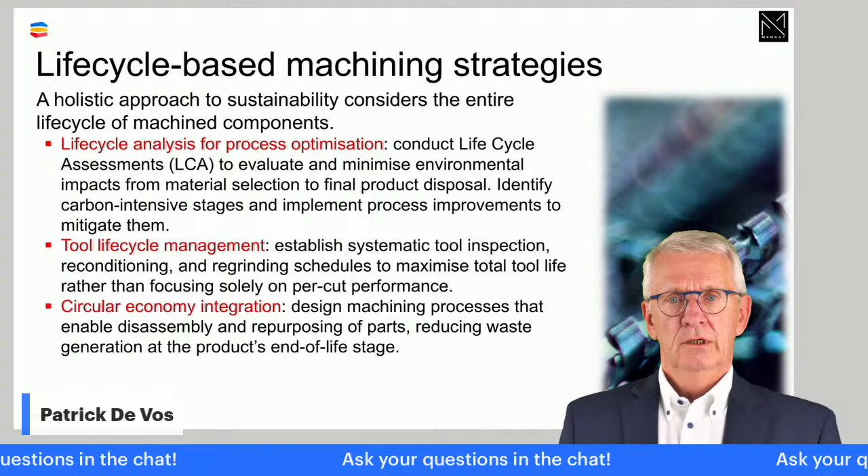A personal example I know from my own professional work: in a company, tons of paper are used in printers, and the lifetime of such paper is perhaps 10 minutes, because somebody needs to check a drawing or something, and then they throw it away - and the backside of the paper is unused. You grasp my idea? If you fully could reuse it, your paper consumption in your company is split in half. That's intra-company circular economy. That's ridiculous, yeah? Is it?

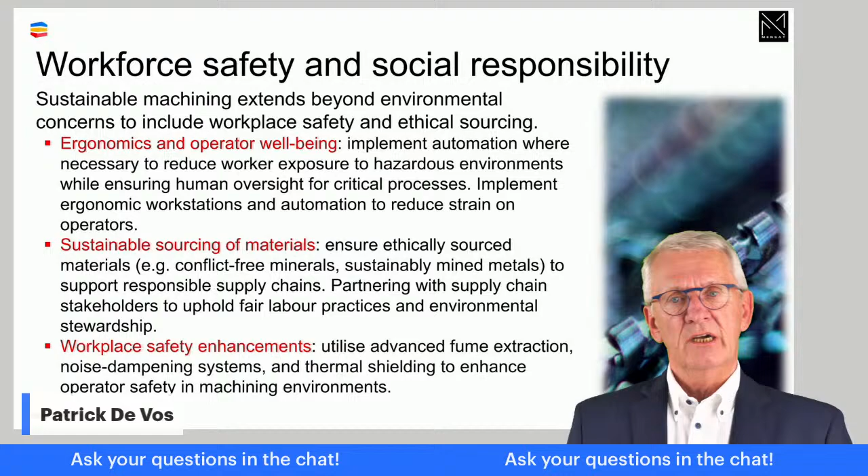Workplace safety - your people, you also have a responsibility there. Operator well-being: from where do you source your materials? Are your suppliers respecting their people in what they do? Safety - it's not only well-being, but also whether it is safe in certain circumstances. Now, I know a workplace is a workplace, 100% safety is something you can dream of, but okay - at least you can aim to go in the good direction. There are all kinds of regulations available to help us there. I'm not a big fan of regulations, but sometimes they give good guidance.

So these are a few examples of what I call sustainable machining strategies. It goes beyond the pure process, and puts the process in the broader context of the company, of the workshop. Now, implementing these - take advantage of, take full profit of, existing technology today.

Additive manufacturing - why is additive manufacturing so interesting? Because it can deliver workpieces which are near net shaped. The very old idea - so the waste of workpiece material is a lot lower.

Digital possibilities, Internet of Things, digital twins - all of that will help you to not waste too much time on trouble and so on. Circular economy principles will help us. So technologies are available, and also hardware kind of tools, lubricants, cooling - it's all there. It's just, make use of it.

The benefits - yeah, it's environmental, for the planet, but there are also economic advantages, as I already told you. Be aware that it goes two sides. If you start working with this, it gives you social benefits, it gives you workplace benefits. I mean, for people, it's...

Technological innovation - because everybody is after innovation. And sometimes I think, yeah, innovate - where is the innovation in machining nowadays? In new cutting tools? No, not really.

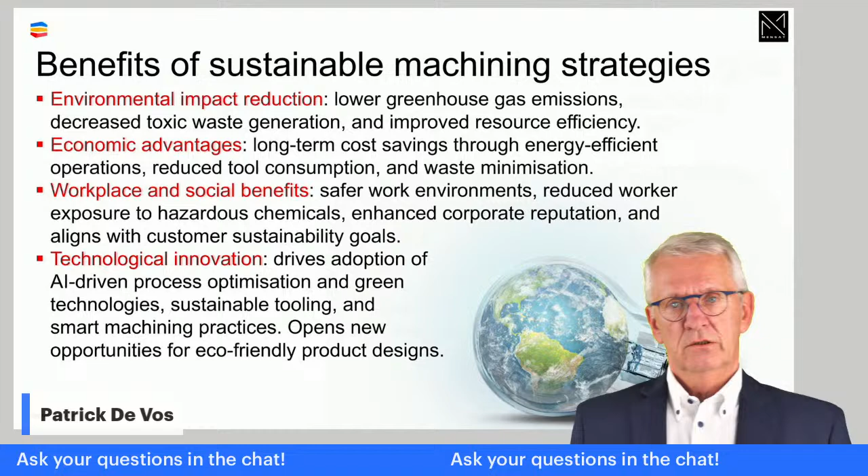That's a very mature thing, but it's more in how things are used, selected. That is where the innovation still is. And there are challenges. I know if you start thinking about that, the first one everybody comes up with is, yeah, but it's expensive. There are investments to be made, but that is part of any company management's targets or tasks.

Look into investments that needs to be done. There is process transition. We always did it like that, why should we do it different now?

There's always what I started with, that thinking: yeah, but if I prioritize sustainability, I'm going to lose productivity. No, no, no.

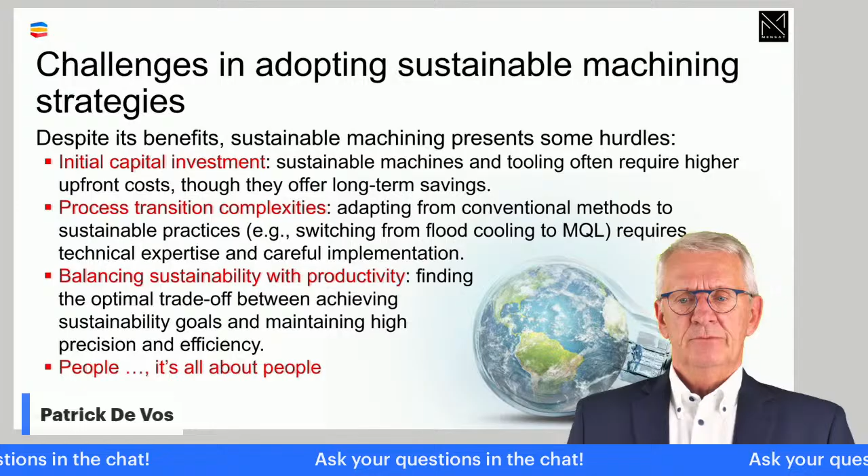In the end, it's people that make the difference. It's people that will drive this whole thing. But to make sure people are on your side, you have to make sure they have the correct education, that you communicate with your people about why we are doing this, what is the target, what is the purpose. Involve people from the beginning. Don't confront them with a given thing and then that's it. Make it practical. It's all very nice to have discussions in boardrooms, but in the end you have to leave the boardroom, go to the shop floor, and start doing things.

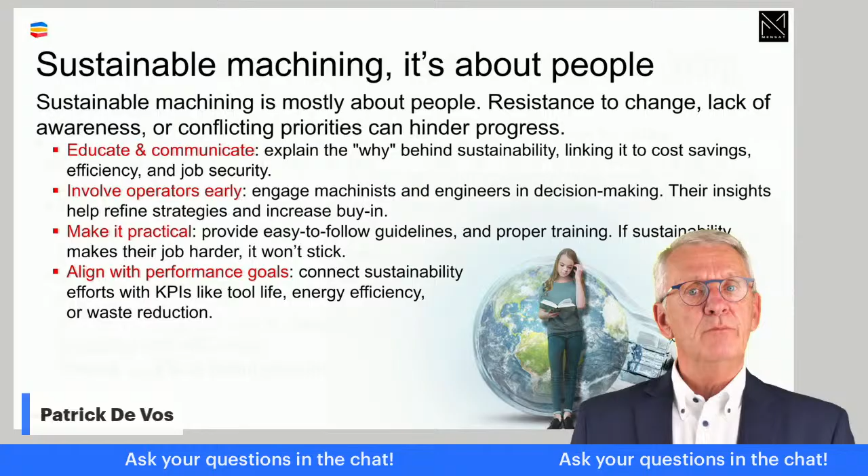Make sure it aligns with your KPIs. And it's not a big problem to align it, because I hope I at least made you doubt a little bit. Perhaps sustainability will help us. I know there are initial investments, but it will help us reduce our costs, increase our productivity.

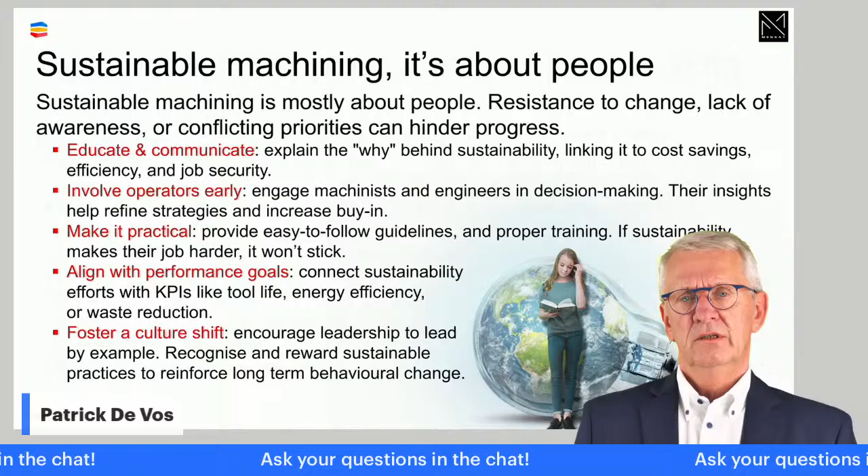It's a bit also a culture shift. I think it's lesser a technology thing, it's more a cultural thing, and it's people that will help us mostly.

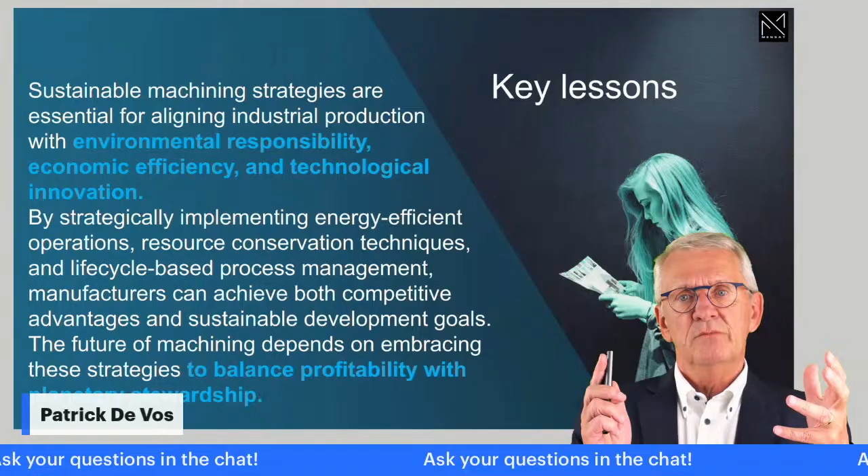Some conclusions. It's all about bringing environmental responsibility, economic efficiency, and technological innovation together. Those three together, that's now my new definition of machining strategies in small batches. It's about, as example, setup - what can we do to reduce setup?

Minor standstills, people call it, or people specialized in production organization. If you talk with them about machine utilization, there's always a chapter on minor standstills. Minor means small, but if you dive in, you could see in small batch production that minor standstills end up to be 30-40% of the time. That makes them major profit killers.

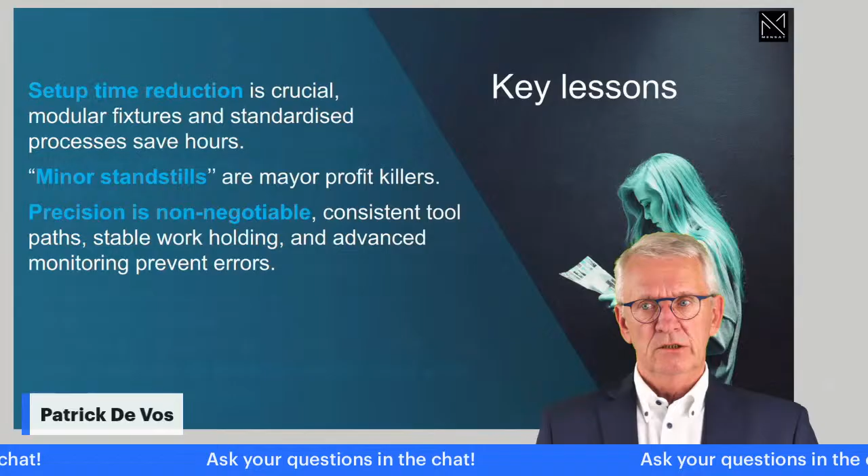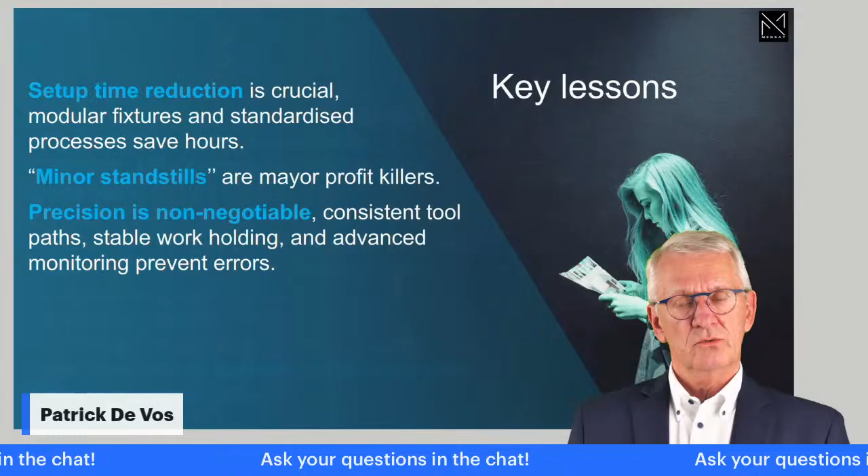In whatever you do, I think it's important to realize that precision is a non-negotiable factor. You can't deliver to your customers workpieces which are nearly good, they must be good. Invest in tooling, invest in learning, optimize workflows, adapt and refine strategies. That is what we have been talking about here.